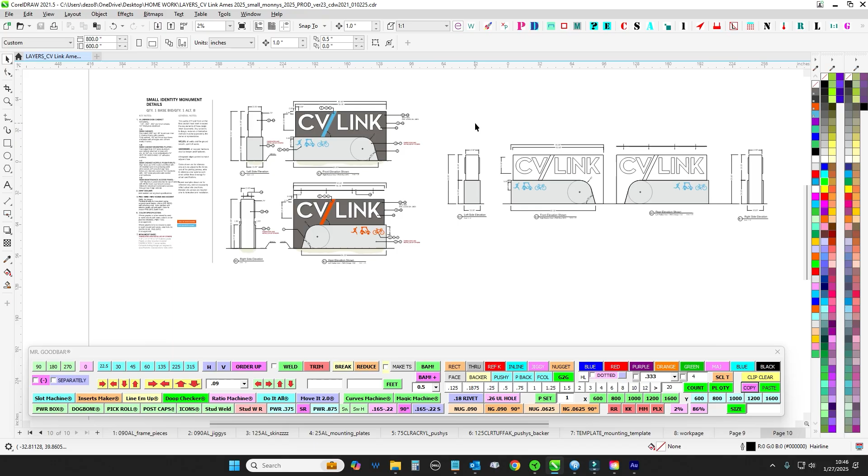Time for some CV Link. So we got these two small monuments for Ames. Gonna get these on step, get these knocked out.

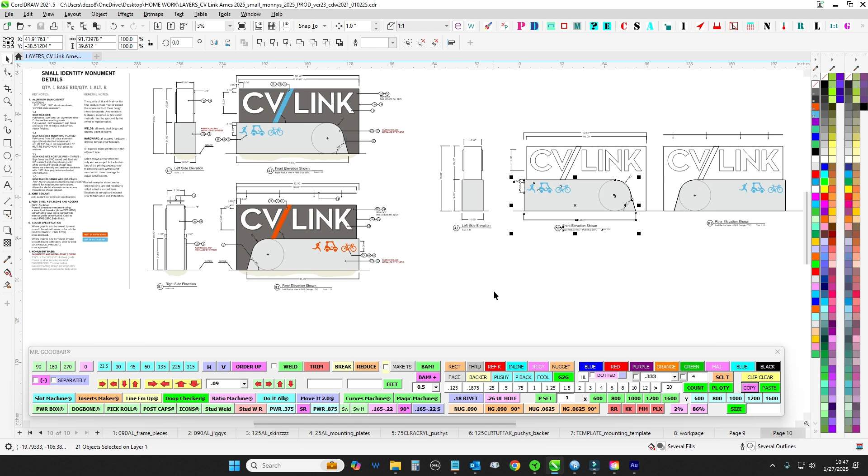Pretty straightforward on these guys. Just think the Nobu cabinets you guys did, the two Nobu monuments, except this part's gonna be concrete. And they were gonna be electrical, and now they're not, so they just got that much more straightforward. Nothing's really ever easy, but you guys shouldn't have any issue with that. So with that being said, let's get after it.

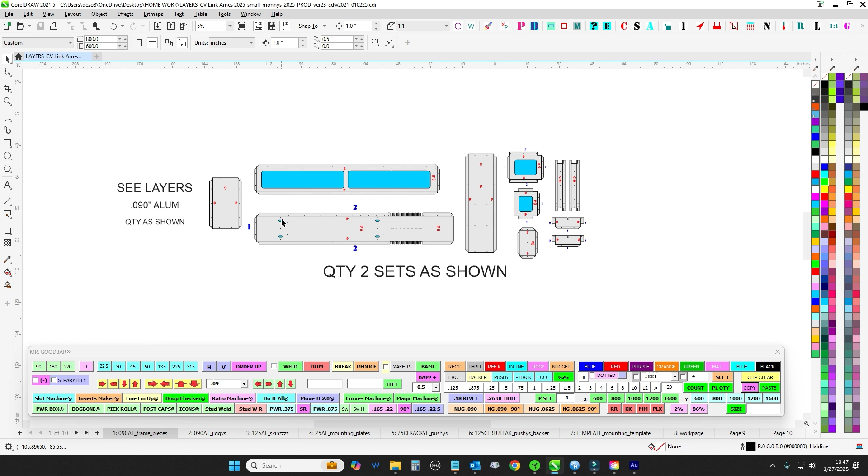So we got ourselves lay of the land. Now I know we're the global war on weight, we're in Operation Supermodel, but these guys were designed by somebody else. So they are going to be chonky because it's going to be 090 for the body that you see here. Got all the frame parts, you got your jiggies. But the skins are 1/8 inch, so all the skin panel stuff. So they're gonna be beefy boys, and or girls, whatever, however they self-identify.

So you got your 1/4 inch plates for mounting. It is going to be 3/4 clear push through, but keep in mind nothing's going to first shop. These are non-lit, but they still are push through. So make sure that for Jose, the strategy gets adjusted.

So the whole idea is to have a 1/2 inch at the face. I know when we do push throughs, it's always kind of give and take. And even though it says 1/2 inch push through, by the time you push it through 09 or whatever, it's always a little under. But we're going to try to make it actually a 1/2 inch at the face. So get that dialed in.

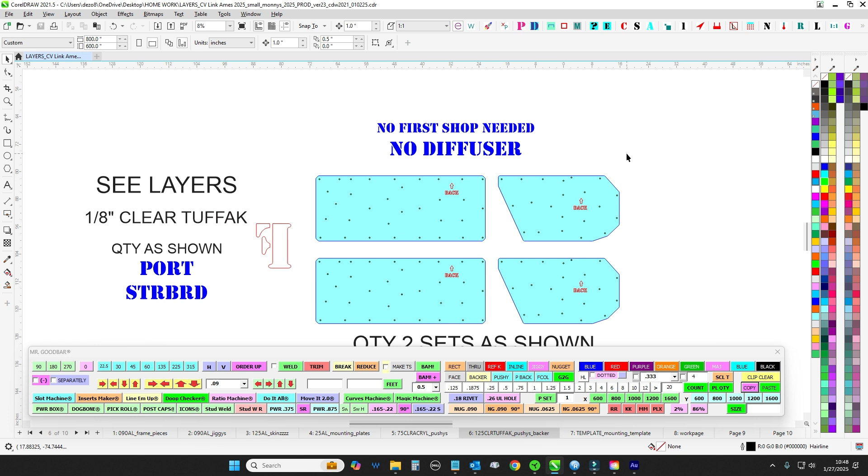And again, no diffuser needed. We're still just going to keep them in place, but keep these out of first shop. Save that labor, save that material. We're good to go. Template material, whatever it is, dealer's choice on that, plywood or whatever.

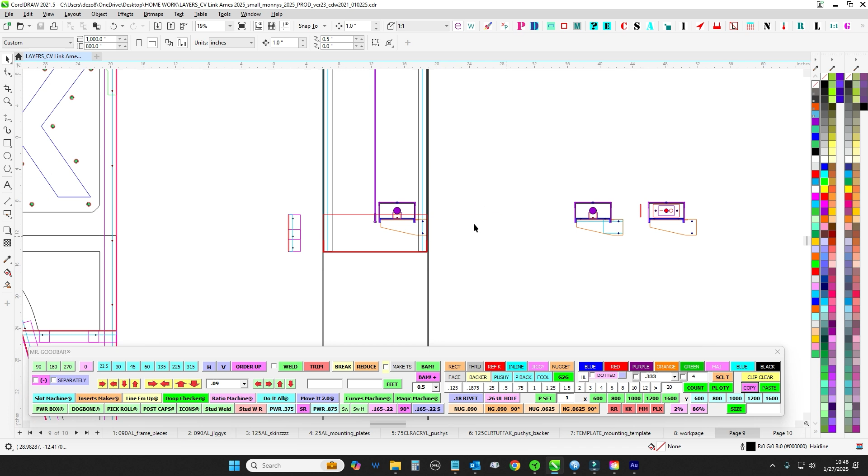So again, pretty straightforward. You can ignore page 9 here. This was going to be electrical, but there are vestiges of certain parts for the little tray and all that in case we ever do make these into electrical, which I seriously doubt because they're not going to run conduit into the concrete. So that means that it would be like an external box over here, and they probably wouldn't do that.

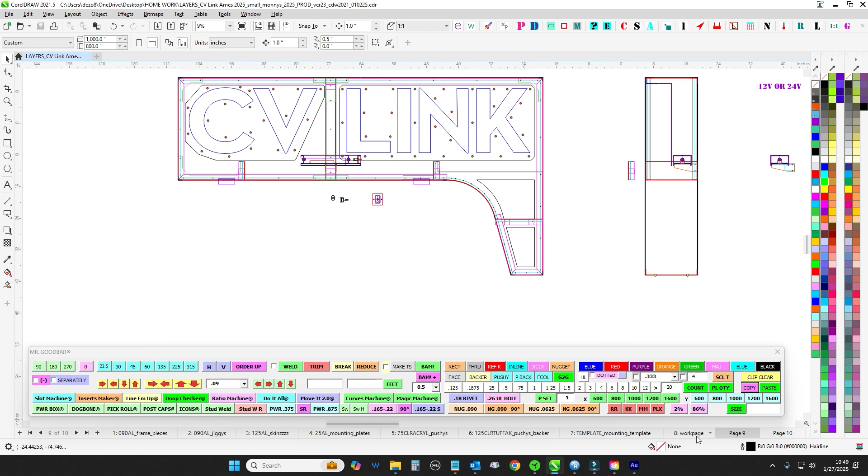But theoretically, we could swap the pushies out, and we could build a little box and all that. So when you do your supports here, I went ahead and left these holes. So if you see these little holes here, that's what those are for. We're not missing anything. Also, much like Nobu, there was going to be these little notches for wire for the 063 to set in.

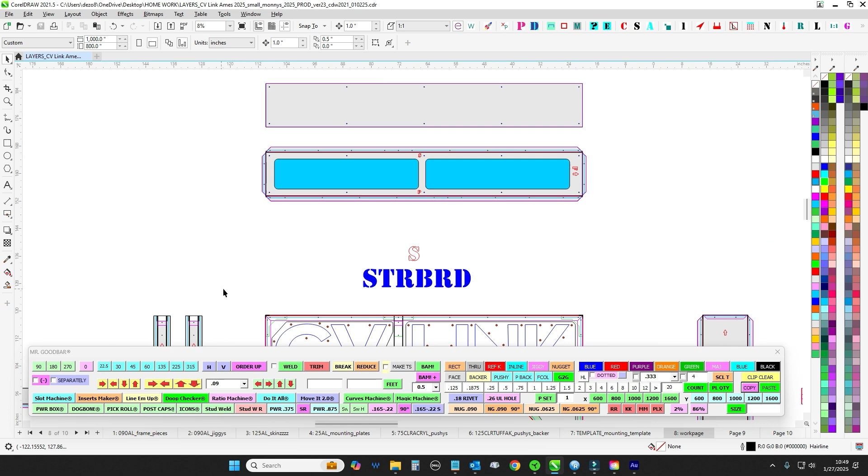So if you see that notch, it's just there because there was going to be something. But otherwise, you got your front, you got your back, your side to side and all that. You got your top. F is for front. Unfortunately, F can be face, F can be forward. But for this time, F is front and up.

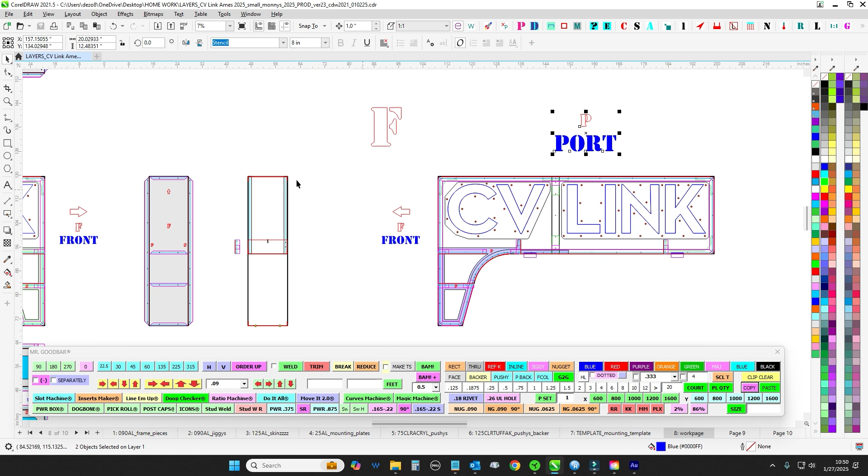And then of course we have a starboard side and we have a port side because CV Link has this, I have to put the actual brace for the face in between CV and Link, which means when you flip it, it's going to be towards the middle-ish part here on starboard side, but it pushes the thing to this side on the port side. And it actually incorporates the brace into the jiggy.

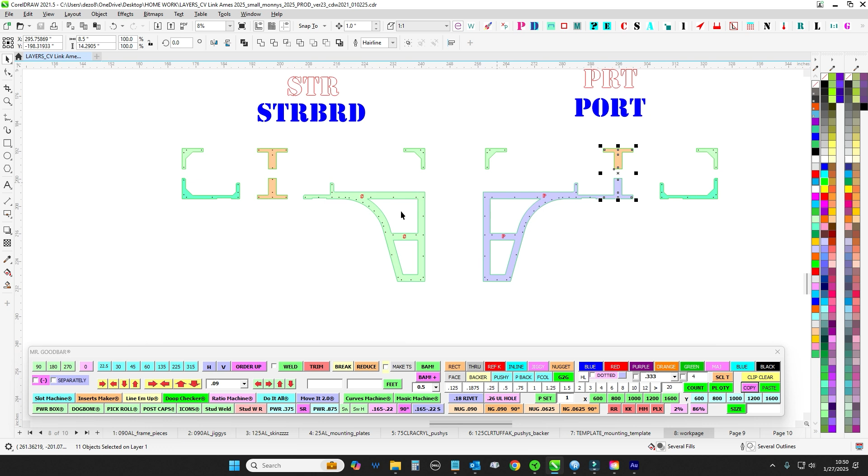So you'll see there too that there's a starboard side, which has the two braces for the center C channel. And then the other one is integrated into P. So you got S for starboard, P for port. But otherwise, all the other jiggies are standardized. So you see the same color there. And again, I just went over that.

These are going to be getting painted white, opaque, but they're going to look like flat cutout letters. But they're going to go push through. Now, Johnny did express a concern that when it comes time to assembly, make sure that we do not scratch these going through. So just take your time and make sure they get pushed through and they're nice and clean and no scratches. I did tell him that we do a 03 on both sides.

We do a 03 on the metal side and 03. I said we could theoretically change the strategy up and give it more room, but he didn't want it to be too sloppy. So I think a .06 overall should work. But again, just heads up on that.

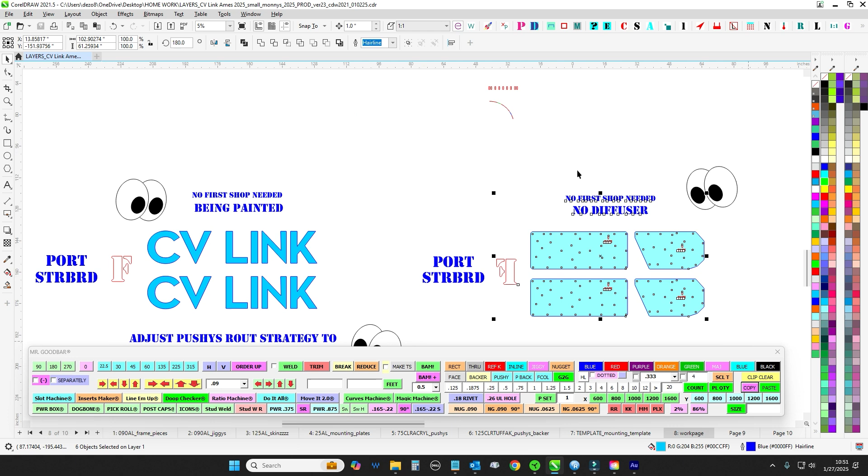And again, keep everything out of first shop. No first shop needed. You'll have your 1/4 inch plates. You just go ahead and put them into the jiggies like we do. Tack it all up. Make it all sexy. And again, you have 1/8 inch instead of the usual 09 or 063 like we're doing now.

So, but otherwise, yeah, you see these aren't that bad. You do have a little bit of curvy there. So make sure that looks good and sexy. And that's going to match the concrete, hopefully.

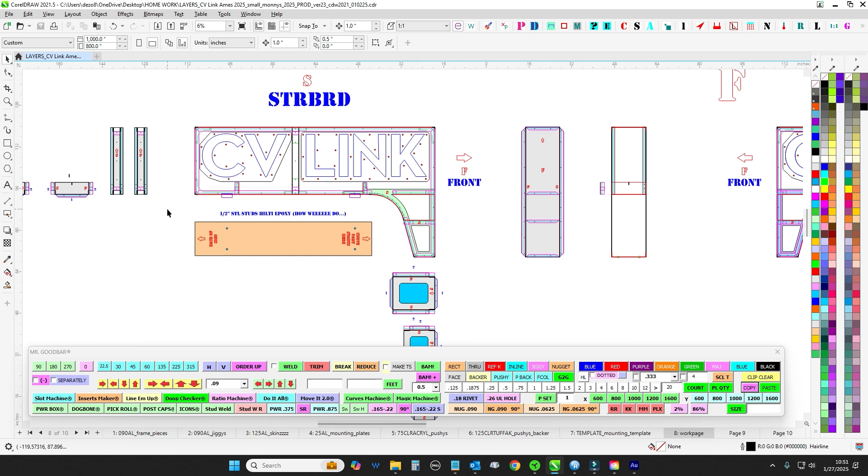For install, it is, I think, specified as the 1/2 inch studs like we do. And you're going to Hilti epoxy into the concrete, once it's poured. And then you're going to let it cure up real well and stuff, and then we're good to go.

So otherwise, but yeah, I think that's it. You guys got these, 2 of them, knock them out. We'll be laughing. So as usual, if you have any questions, hit me up. Check the technique. Check the technique. See if you can follow.